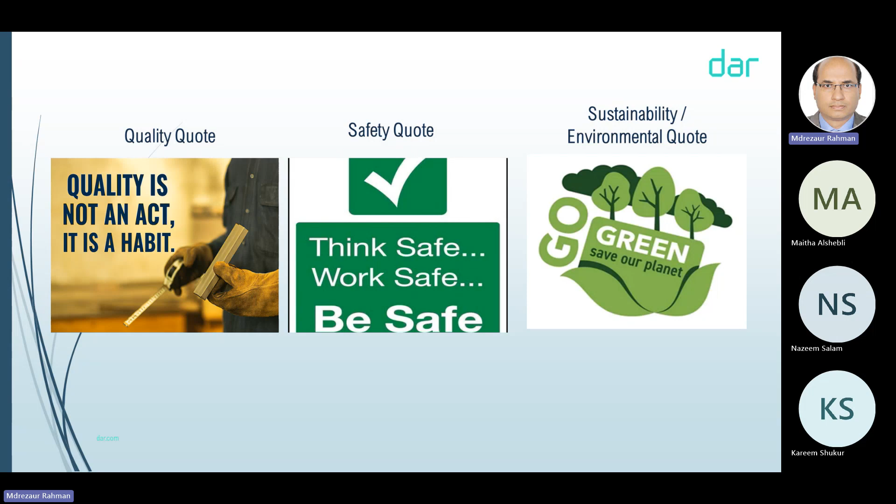So greenhouse, can anybody tell what is greenhouse? Greenhouse is, actually, normally we are using here SRC cement, sulfate resistant cement, which is making issues in the climate. Okay. Greenhouse gases. Okay, I will explain.

If you see, this is the sun; from the sun, sunlight is coming to the ground. The ground is absorbing the heat, right? And then it is emitting the heat again to the environment. But there are greenhouse gases: carbon dioxide, nitrogen dioxide, and a lot of chemicals emitted to the environment. Even the water, the cloud, what comes up after evaporation, is also greenhouse. So what is greenhouse gas doing actually?

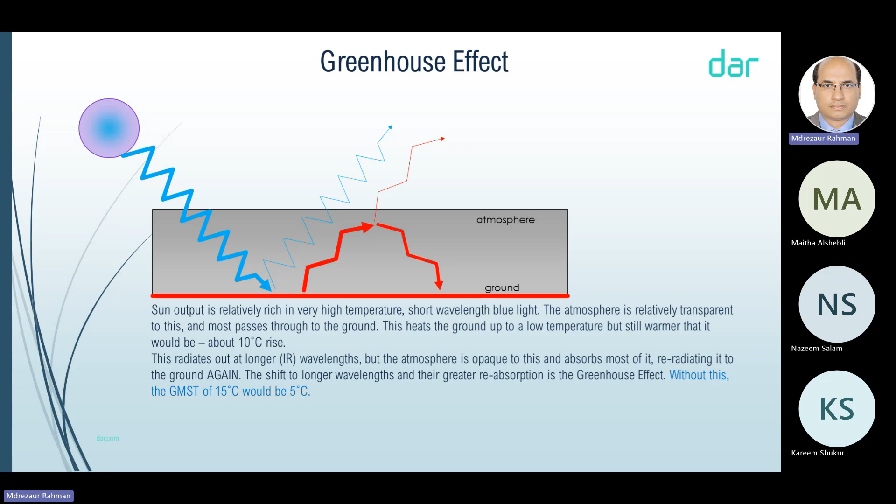So if temperature is high or if it goes down, this is also a problem. Right now it is a stable condition. That's why we are all afraid that if carbon dioxide emission is more, it will absorb more heat, and the temperature will be higher and we cannot live. Many plants will die. So this is the main greenhouse effect, shown by sketch.

Now I'm coming to carbon dioxide. What carbon dioxide is emitting is 76% of the total greenhouse effect. The remaining 24% is other gases. Got it? If anything needs clarification, you can ask.

So what is the source of carbon dioxide? For example, everybody has a vehicle, right? This petrol is basically producing carbon dioxide. Power generation, electricity - we need energy, fuel, coal. So all of these are basically emitting carbon dioxide.

That's why electric cars are encouraged. Elon Musk started another electric car company. Electric cars are environmentally friendly. So 76% is carbon dioxide - that's why the whole world is very concerned about reducing carbon dioxide.

In the EU, by 2050, net zero means carbon dioxide emission should be zero. That's why we're encouraging electric cars, although the target was 2030, it is impossible to reach by that year. So 76% of the total greenhouse gas is carbon dioxide - that's the main one.

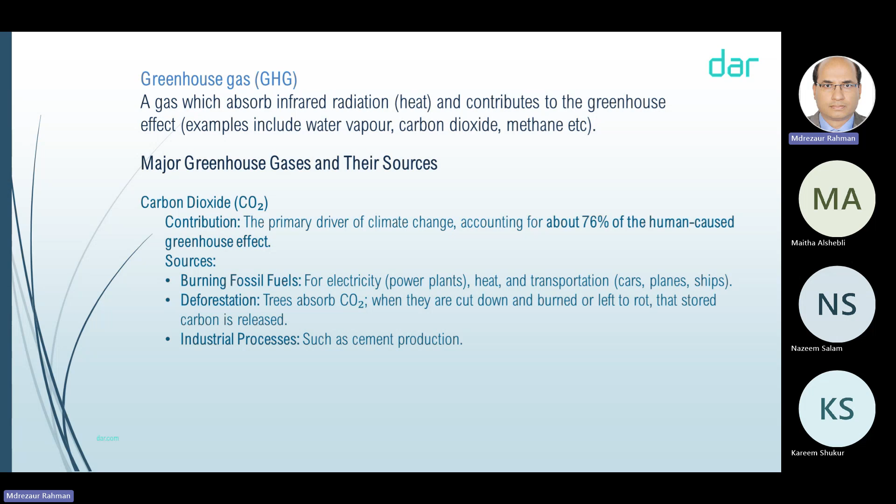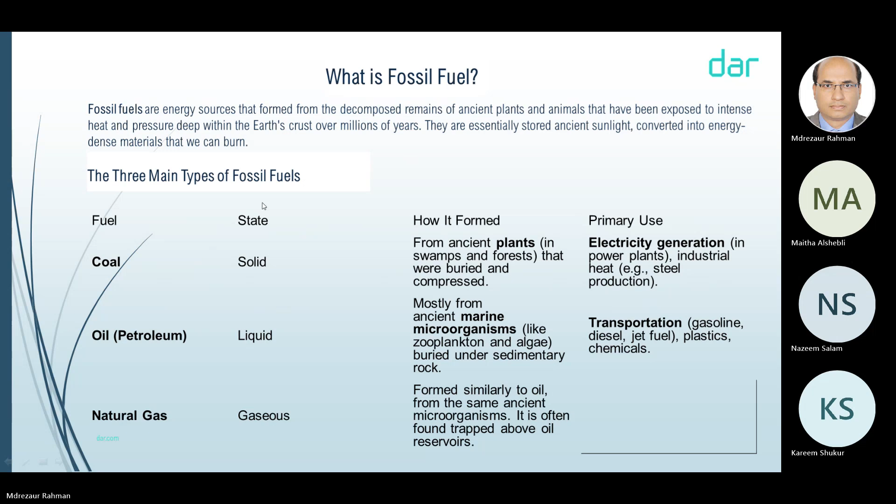Okay, Engineer Moore? Yeah, okay, so this is mentioned - where it is coming from. I'm going very fast. Now, which countries are most emitting carbon dioxide?

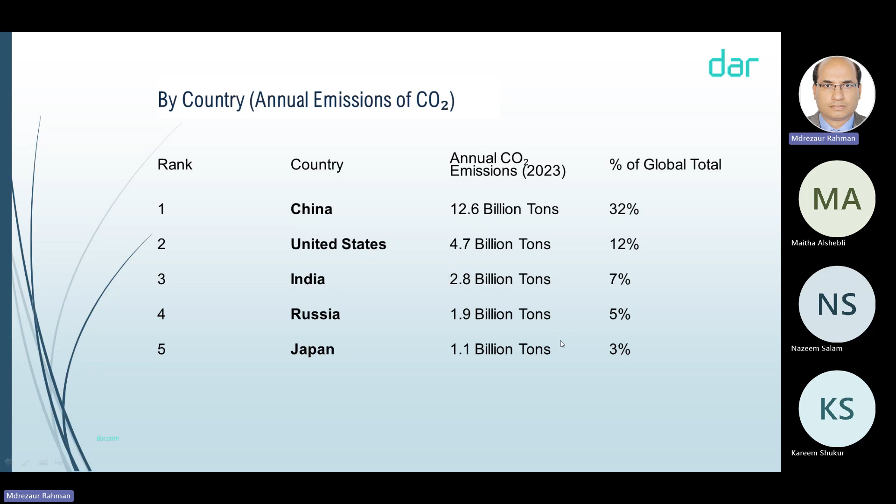China - China 32%, most of the people, most dense population. Then United States 12%, India 7%, Russia 5%, Japan 3%. They're emitting carbon dioxide.

Now this is the carbon dioxide - EU is a very small region, right? China is a big country, so China's emission is big. Now this is per capita, per person - the global average is 4.8.

Qatar is the highest. Qatar is a very small country, but they are using maybe 3-4 cars per family. Power generation is high and population is very less. So Qatar has 35.6. Bahrain has 26 point something. Most Middle East countries are very high because every family has a car. In China or India, most families have no car.

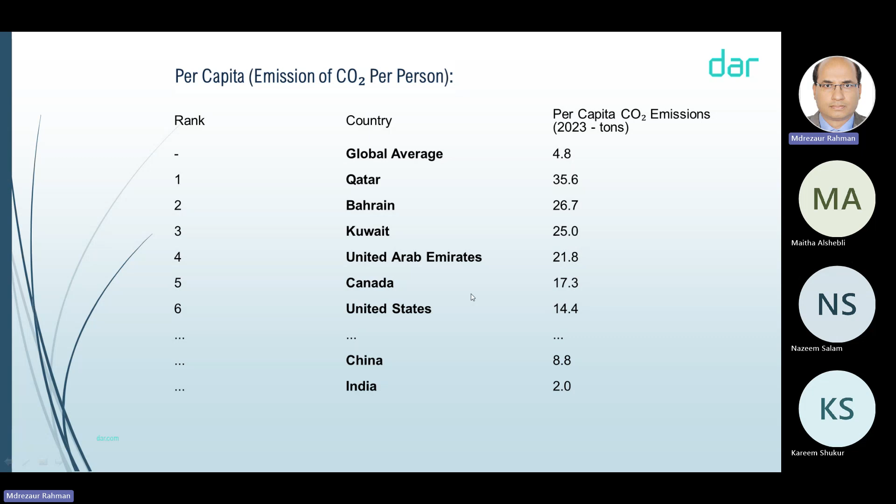This is sector-wise carbon dioxide emission - energy and electricity we're using is 40% of carbon dioxide emission. Transport - everybody is using it, you're using transport, right? So everybody is part of damaging the environment, everybody.

That's why we should reduce electricity use. I prefer that if I go out, it should be switched off. Use fewer cars, and water usage should be slow. Water generation also needs energy. So our every activity is damaging the environment.

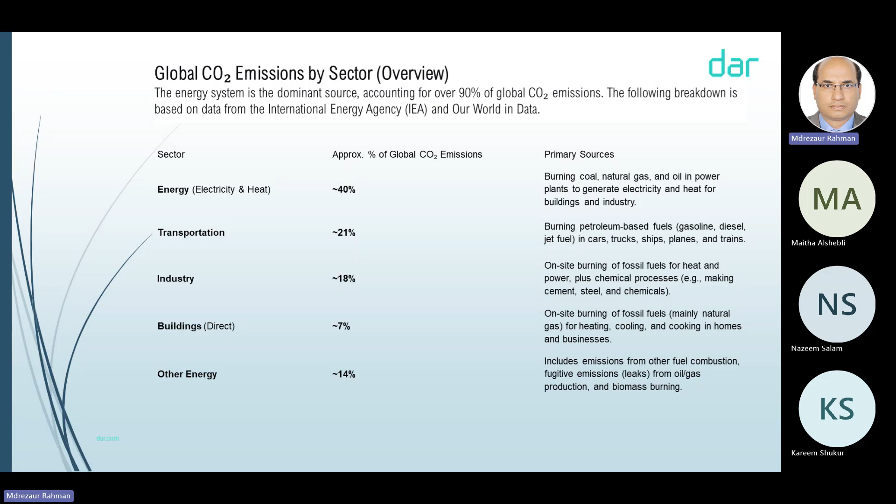Okay, now I'm coming to concrete. What is the relation between this previous subject and concrete? What is the durability? I'm coming to that - now I'm going to the concrete.

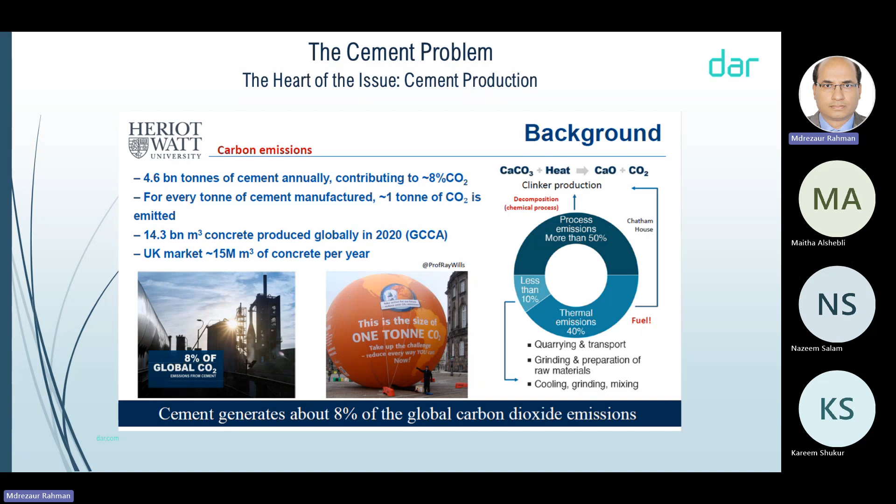Concrete - if you see below, 8% out of 100% carbon dioxide is from cement. That's why we are concerned, and we are replacing cement with other materials.

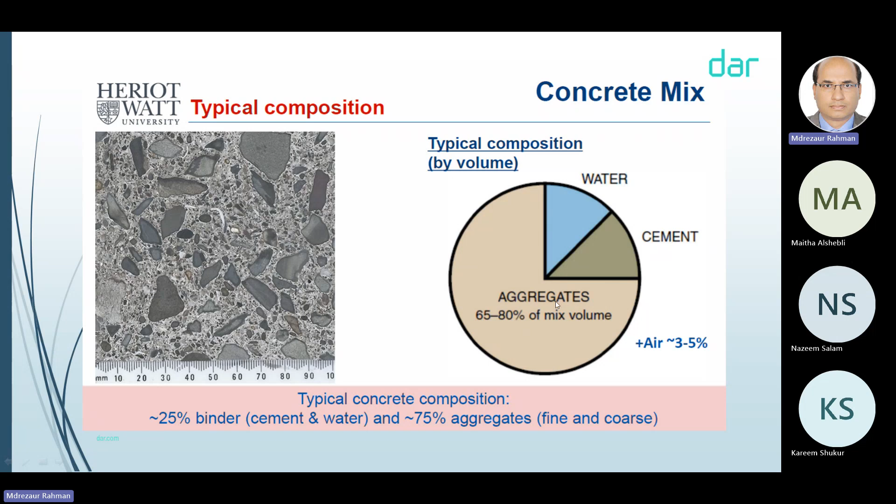If you see the general configuration of concrete, the aggregate we're using is almost 75%, while cement and water together are 25%. Now, cement production - I'll go to the next phase.

Cement production - do you know what temperature is used during cement production? 1450 degrees centigrade when cement is produced. This total heat used means a lot of coal requirement, a lot of energy required - 1450 centigrade during production. That's a huge amount, and it is damaging to the environment.

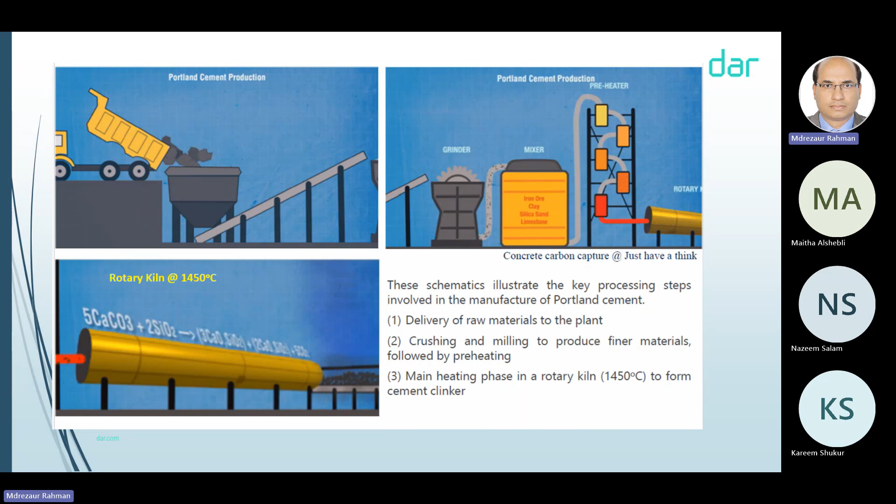That's why it is recommended to replace cement with GGBS and others. This is also only SRC - they are going through the same actual production. OPC and SRC have the same production process.

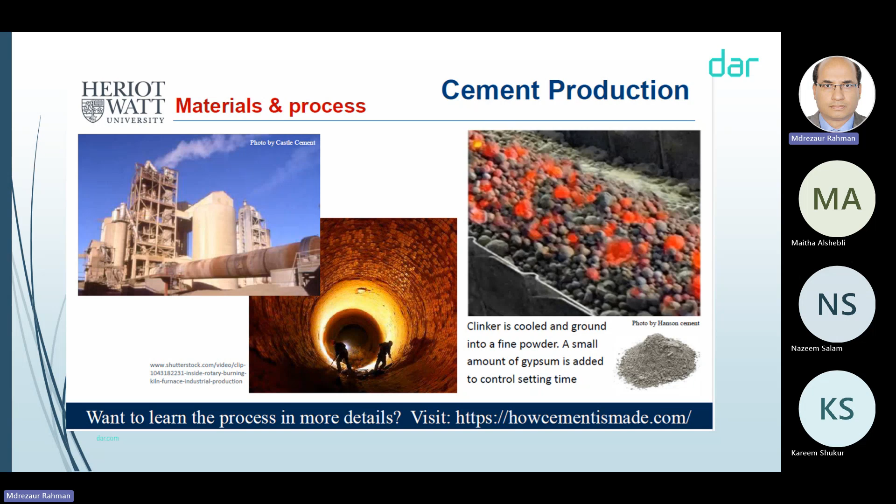Now what is the replacement? So you know, how many percent of GGBS are we normally using?

So why are you using GGBS? For green concrete, right? Because OPC is damaging the environment. If you reduce OPC, you protect the environment. GGBS is not damaging the environment.

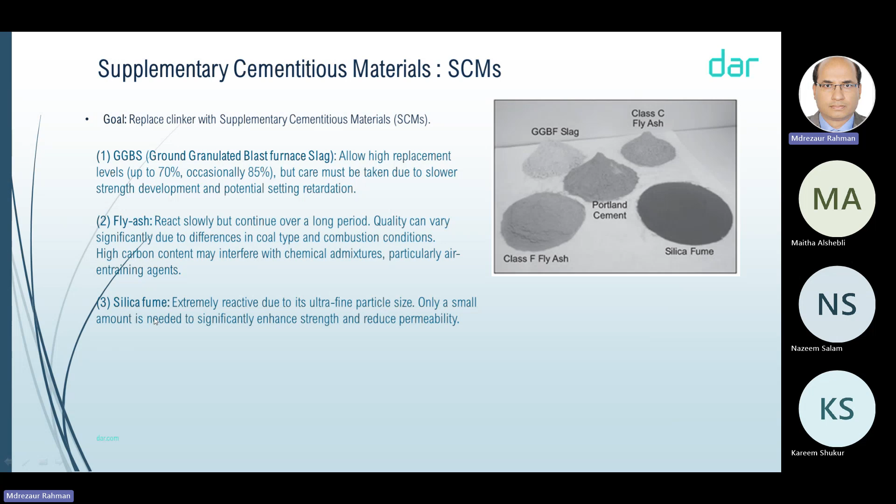20, 40 sir? No, no, no. I think it is used with GGBS. It's only used here with GGBS because it's very fine, it makes paste.

And it is filling the small points, that's why concrete is better. Normally if you use only cement, there is a lot of voids. Microsilica is only to fill the voids.

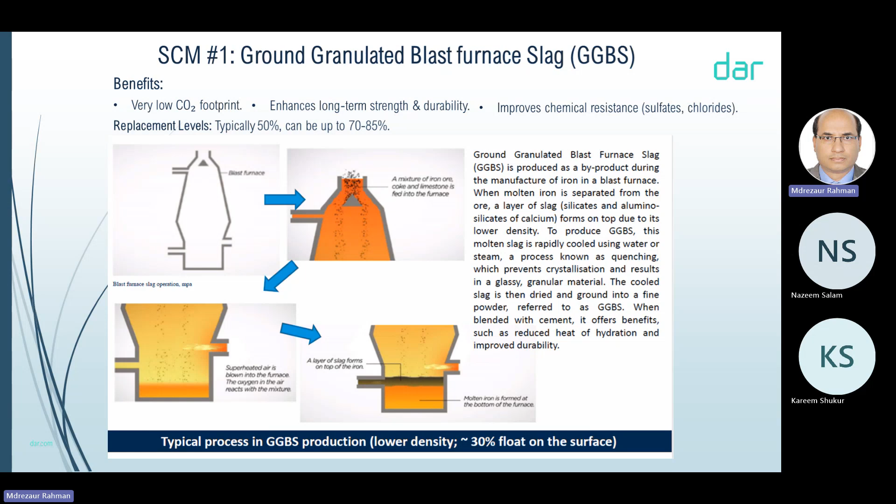Okay, so now fly ash. Fly ash also same like GGBS. Fly ash is producing when power plant, when electricity generation, if you see. Ritesh, hopefully you will take the next session.

When power plant, it is like a power plant. Fly ash use is coming from the power plant. When you use coal, it's the byproduct. Coal, fly ash is the byproduct of coal. Wherever you use coal, byproducts. So that means no need to produce it separately.

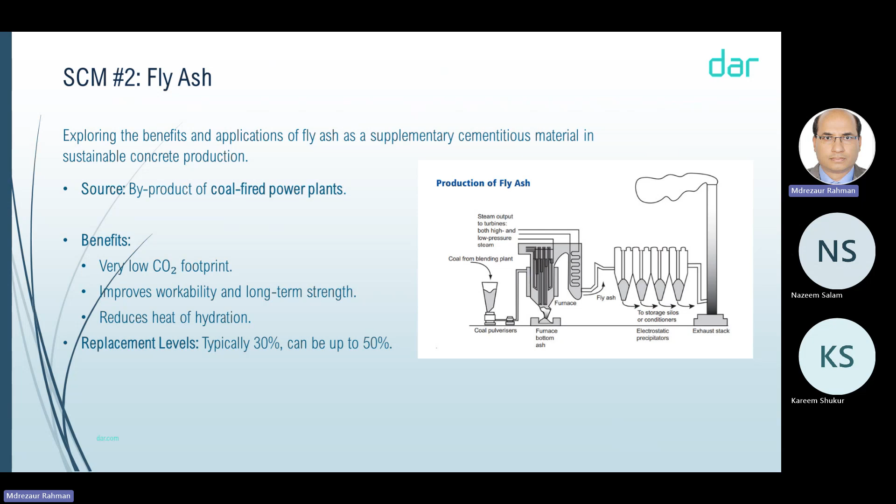Same like microsilica, microsilica is a byproduct. Any industrial, so your microsilica, from where is this production? I forget, it's not mentioned. GGBS is from steel, so microsilica from where? Oh silica, I believe it's metal. This is also metal. For the metal, it is a byproduct here, it is used. So it is not separately produced.

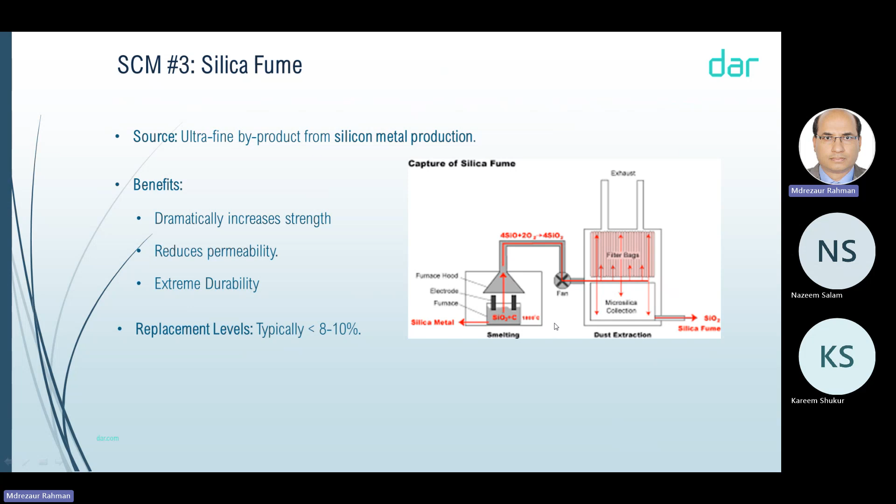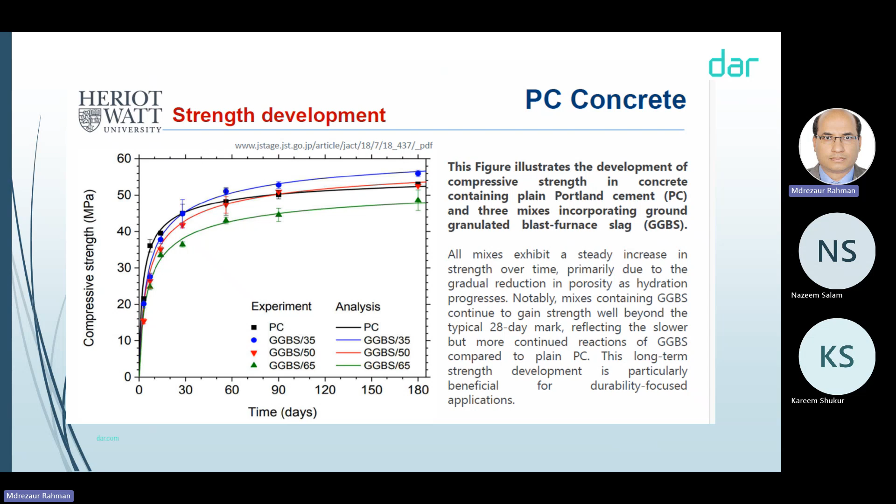Okay, that's why you are selecting it. Initially it can delay, okay. Now this is the heat of hydration. Concrete, when you mix the concrete, there's heat production, right? Do you have an idea about the reaction?

How heat is released or produced? When cement mixed with the water, the chemical reaction will result in heat. The heat will occur at the same duration as mixing. Exactly. So here, if you see that when you cast any foundation, for example encasement or whatever, so the center area.

Red area is high temperature. It will be high temperature because it cannot release heat. But in the perimeter it is releasing to the air, right?

Yeah, that's why perimeter area temperature is low and center area temperature is very high. So this area, it will expand, right? Heat is more means it will expand, and heat is less means contract. That's why this crack is happening. This is the reason.

Okay, so same it is mentioned here. And here, if you see the graph, initially quickly the heat is very high. Then next 2 to 4 hours, it is like that. Then again, initial set. Anybody has idea about the initial setting time?

Initial setting, when water... No, when this cement makes the chemical reaction with the water, starting from that chemical reaction, at that time is the initial setting time.

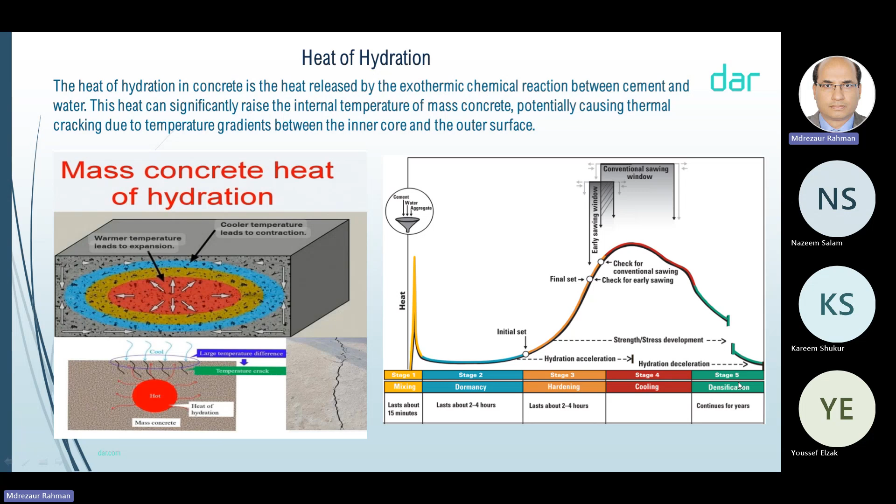Okay, so these are the basic reactions. You know what is a component of cement? Anybody has idea, component of cement? Okay, when cement and water you are mixing, it is showing cement water mixing.

It is creating gel. This is actually calcium silicate hydrate - you are creating gel. This gel is responsible for strength. Why is concrete getting strength? Because of cement. And why is cement getting strength? Because of this gel, as mentioned. This gel is creating strength and producing heat.

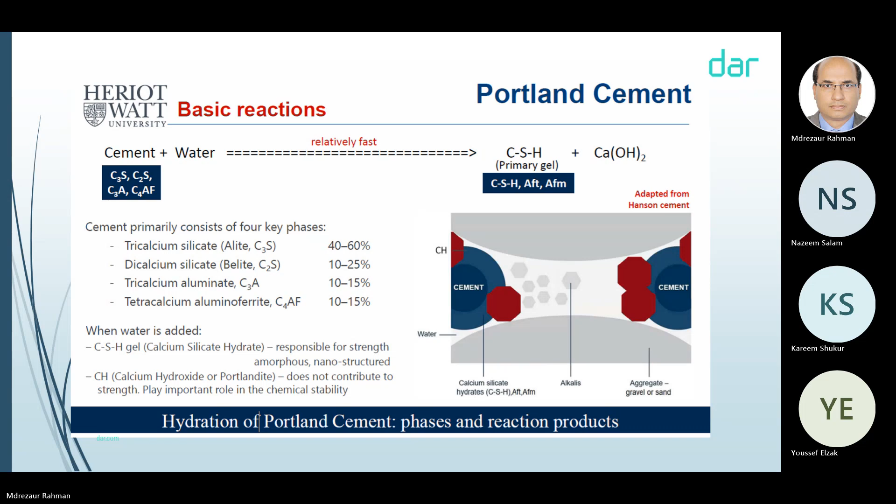When you use GGBS, what is the difference between GGBS and here? When you use GGBS, it is slowing down. OPC is very fast.

The chemical reaction will be slow when we use GGBS, it reduces it. Exactly. So if you use OPC, it is very quick - initial setting time is fast, final setting is also fast. If you use GGBS, initial setting time will be delayed. That's why if you use GGBS, the contractor cannot remove the shutter because it is taking getting time.

This is the basic reason. Today's session is for awareness of the basic things to understand when you go to site, why you will get more strength and more resistance. Exactly. So GGBS slows down the reaction, and that's why the initial setting time and final setting time will be delayed. Okay.

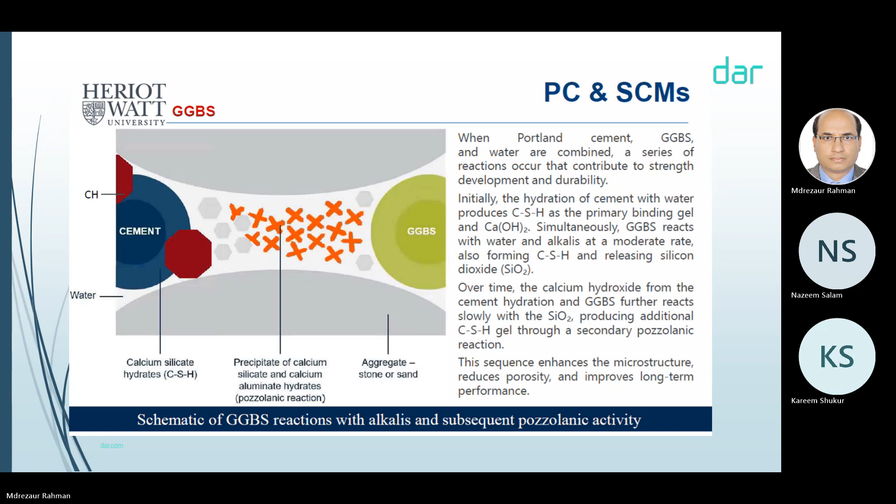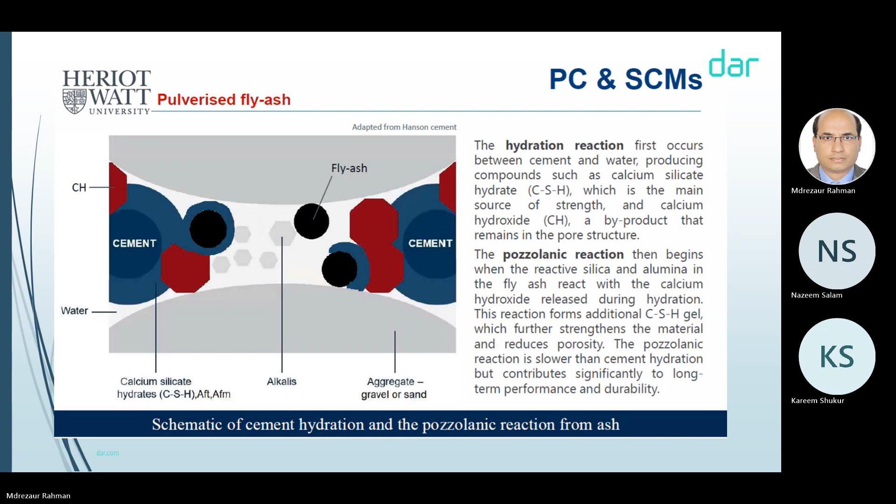Fly ash and durability are also affected with GGBS. Yes, exactly. So what I told you before, GGBS and fly ash produce a soft gel. This gel is filling the voids between the aggregate. This is the main reason for the durability. If you fill the voids, then salt... why are you using GGBS? Because then a lot of chemicals cannot attack. If there is a gap, chemicals can very fast reach and make rust. Okay, this we already discussed.

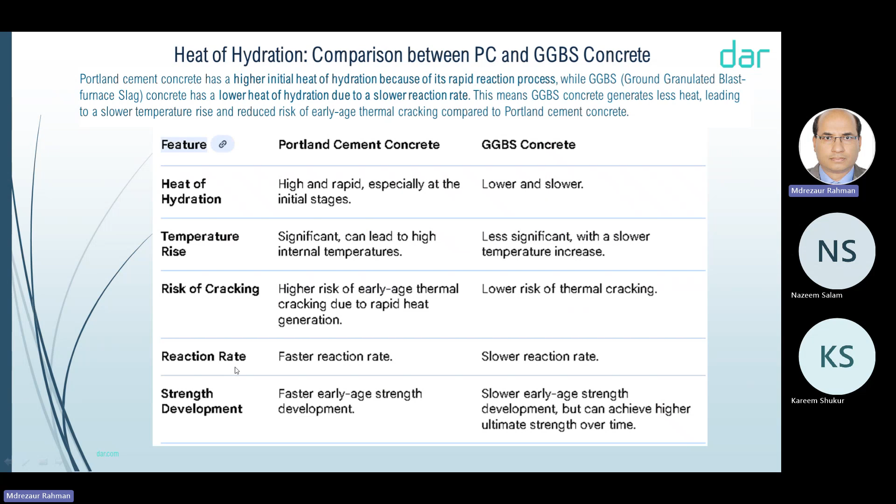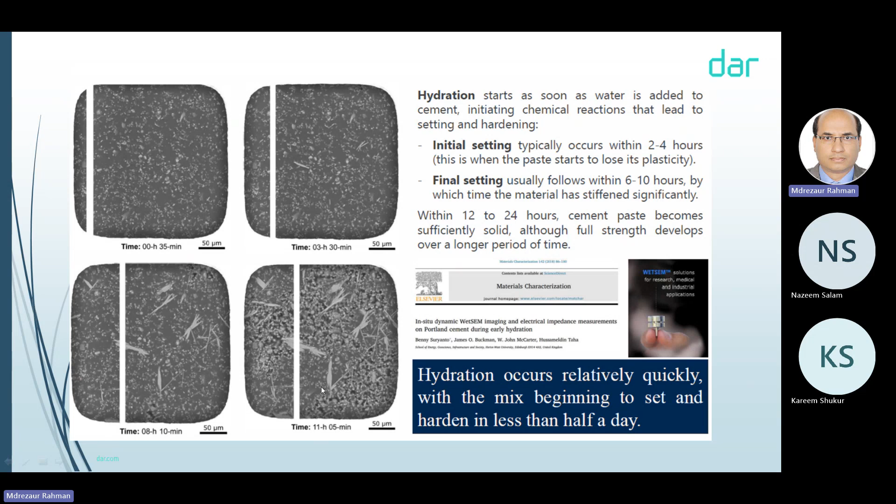This is a microscopic photo showing that after 35 minutes concrete is like that. After 3.5 hours it is like that. After 8 hours 10 minutes it is like that, and after 11 hours 5 minutes it is like that. This is another area. This is showing that after 7 days, concrete is getting 70% strength. So that's why we are taking 7 days cubes, 70%. So always check. Nasir already knows, right? Yeah. Always go for crushing. You will see, but 7 days is indicative. The final test result will be based on the 28 days result.

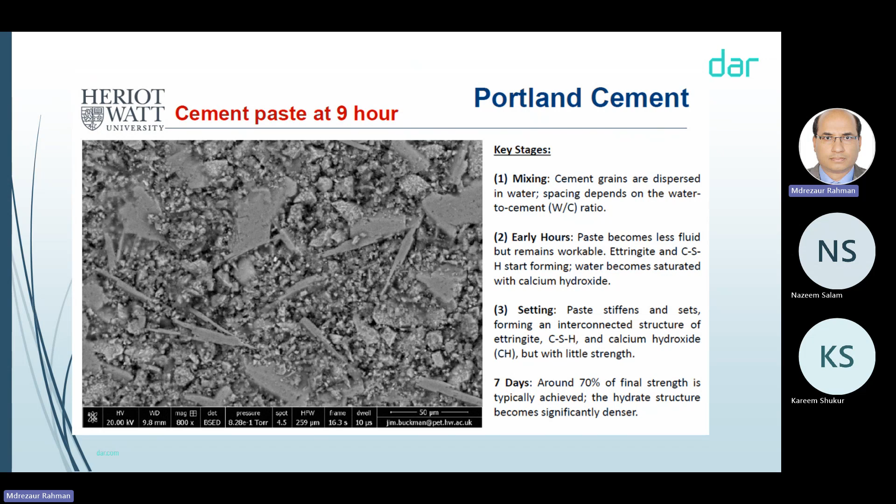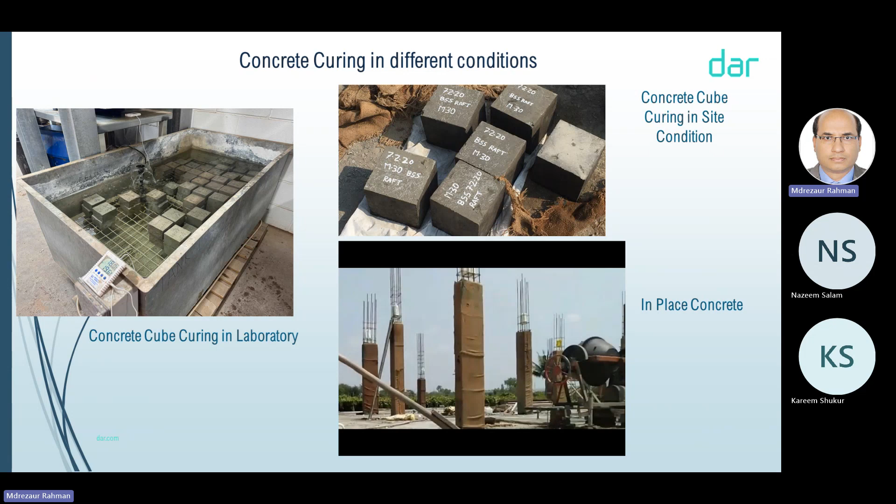because of the temperature. Temperature maximum 30. No, this is the environmental temperature. Because a site cube is very small and it is releasing the heat, the concrete temperature is very low. When you cook, you need to increase the temperature, right? When it reaches a certain temperature, then you can cook. Concrete is like that. More concrete temperature means more strength, because there is more reaction. More reaction means more heat generated and more strength. Every particle reacts with high temperature. Exactly.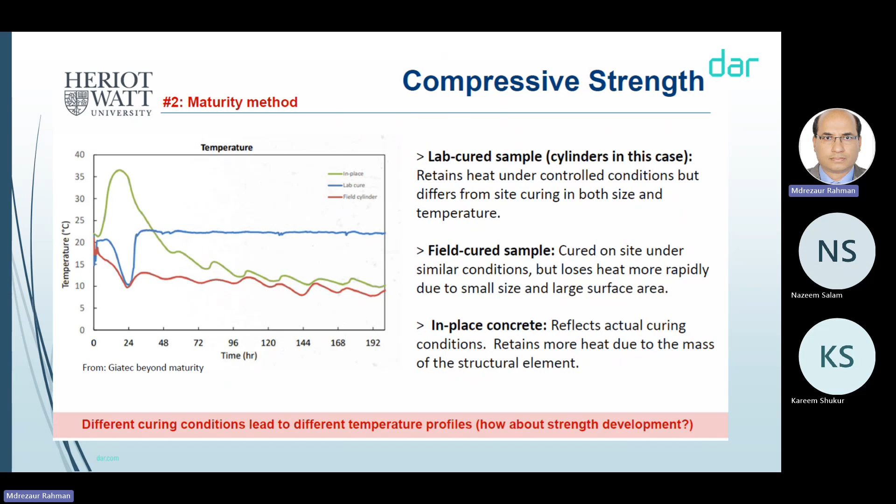And the laboratory is always 20 degrees, right? Always 20 degrees centigrade because it's temperature controlled. Curing 20 plus or minus 2, and the room temperature 25 plus or minus 1. Minus 1 or minus 2? Minus 2. But the ambient temperature is maximum 40. This table is also showing the same. Why are we doing this curing? What is the purpose?

What is the purpose of curing? Curing is done for the durability of concrete, for the strength of concrete. If you do not cure the concrete, the strength will be affected. It will not get the permanent strength, because the cement cannot do the chemical reaction without water. So if we do curing, the cement will do the chemical reaction to reach maximum strength. When we do concreting, there is moisture inside the concrete. If we keep it without curing, it will be absorbed, then the concrete will not get the required strength. Yeah, that's true. When we are curing, we are not giving strength from outside.

We are just protecting the inside moisture. Same. But sites also need the same procedure? Yeah. But who is pouring it? No, only 2 days curing. After that, finishing. Now we have to control. Outside, no curing.

Outside there is a curing compound, right? They are doing very well. Quality is better. They are doing proper curing, right? Yeah. So curing is very important. This is more effective, because they make it protected, so the inside moisture is not going out.

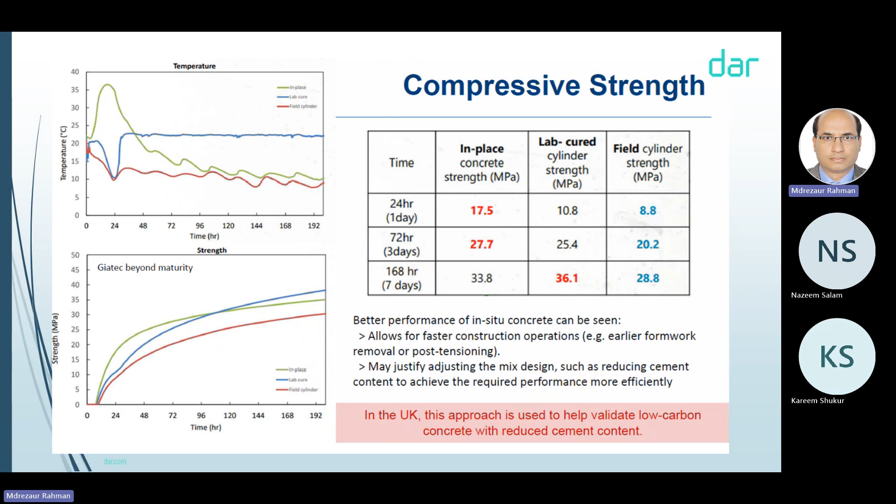Okay, so this table is also showing the same: this is in-place concrete, this is lab concrete, and this is field. So initially, in-place concrete is high, but after 7 days, the cube in the laboratory is getting higher. Can I proceed? Okay, I'll share with you.

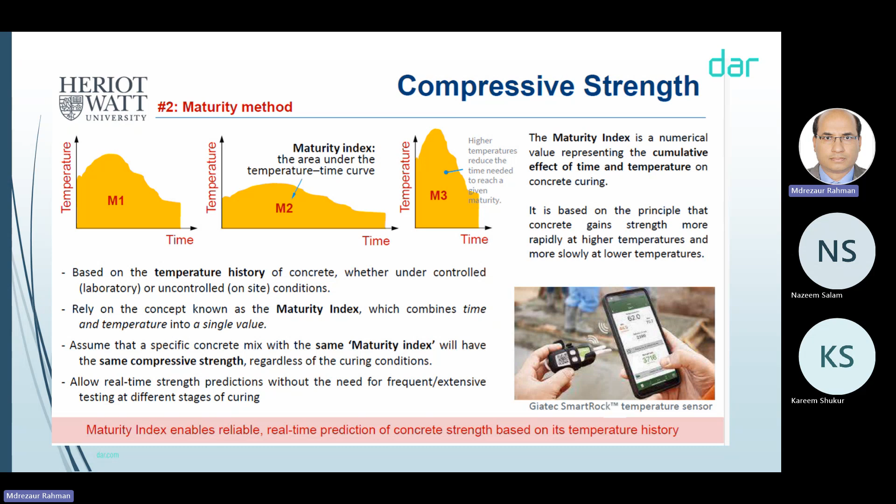What I told you before: more temperature means more strength. This is showing the same, maturity. This is called maturity. Concrete maturity will go up if its temperature is high. Temperature is high, and as time passes, more strength. So if you see, it is showing 7 days.

So if you plot strength and time, initially it is going up, and after 7 days it is almost horizontal. That's why we are taking 7 days curing. 7 days curing and 7 days result. Because after 7 days, normally 28 is better. Exactly. Because after 28 days, the concrete will be 90%.

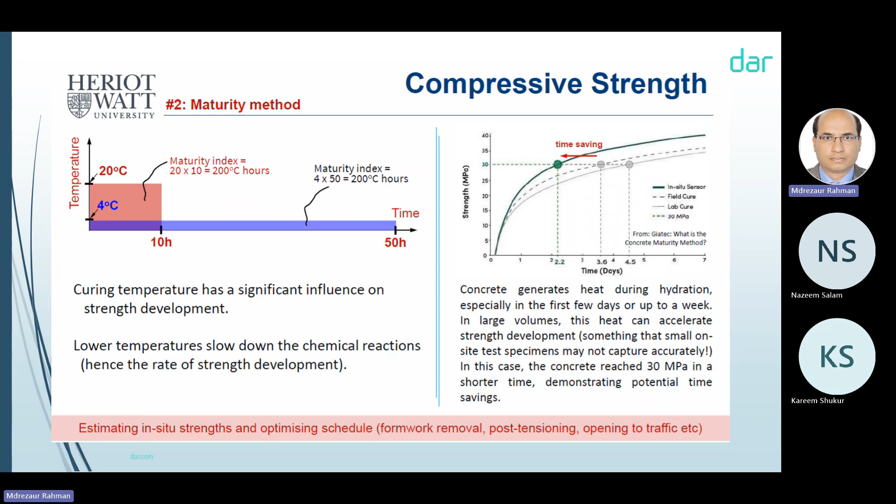Yeah, but 7 days is only indicative. If we are achieving 75% of the 28-day strength in 7 days, then we can say that it's okay. Exactly. But the 7 days is only indicative. Full, actual strength you will get after 28 days.

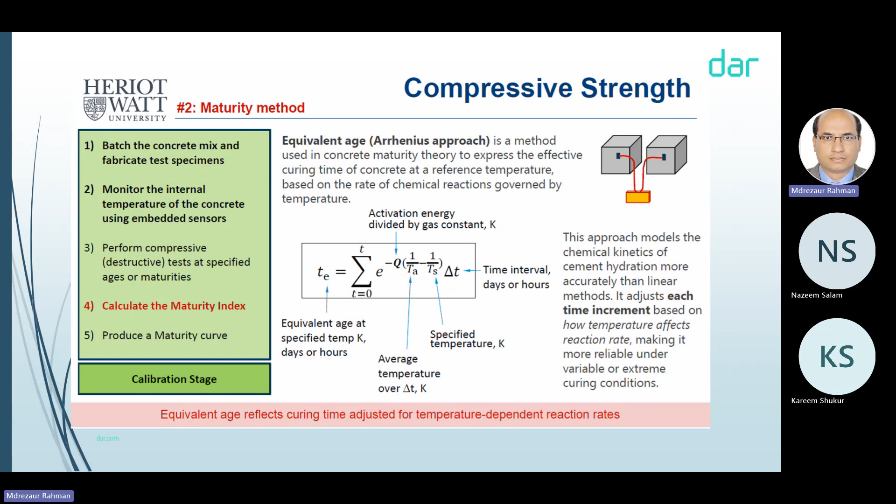Concrete is named 40-20. 40 means minimum compressive strength at 28 days. And 20 means size of aggregate. Because it's internally wet up to 8 days.

Okay, now durability, for the rust. In concrete there is reinforcement, and reinforcement is getting rust, right? What is the reason for getting rust inside the concrete? What is it? Absorption?

First of all, everyone knows what is concrete durability and what is concrete strength. It's different. Durability is the age, the life of concrete, and strength is the power of concrete. If a concrete structure requires one strength, it will bear that. If the load increases, it will fail, but up to this strength, it will be safe.

This is concrete strength. And concrete durability: for example, one structure is designed for 50 years, and if it withstands 50 years, it means it's durable. Long-lasting concrete. Long lasting means more economic. Durability is affected from outside, like weather. So if you see the photo, there is a lot of rust.

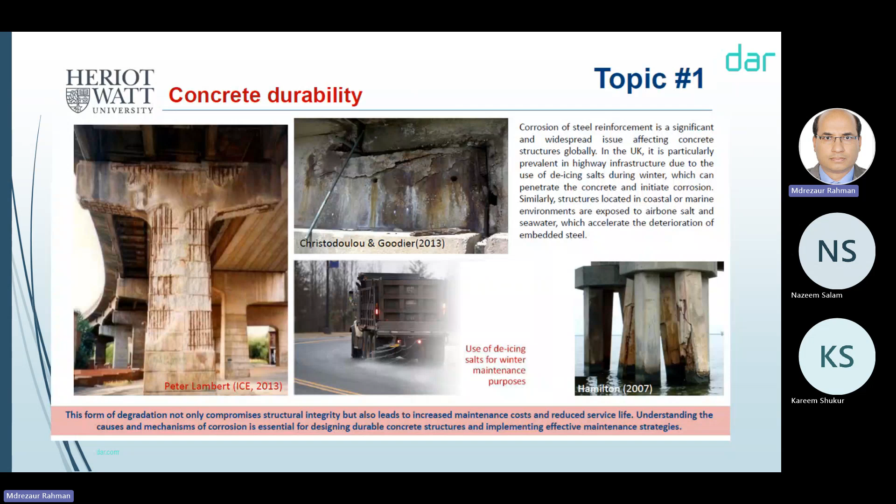So do you know what is the salt we are taking? Cooking salt. What is the chemical? Sodium chloride. Yes. The same sodium chloride is available in the sea water, and the same sodium chloride is available in the soil.

That's why ground foundation is always with GGBS, right? SRC or GGBS. Actually, we are using it under the ground. This is the reason, because there is a lot of chloride and sulfate, and especially sea water has carbon dioxide also.

That's why, to protect against chloride and sulfate, to resist against this salt, they mentioned SRC, sulfate resistant. Durability factors. That's the reason for the steel rust.

So it is shown what the percentage is: chloride is 55% in the seawater and sulfate is 7.7%. That's why chloride and sulfate are the main reason. These are like villains in a movie; this is the villain of concrete and steel.

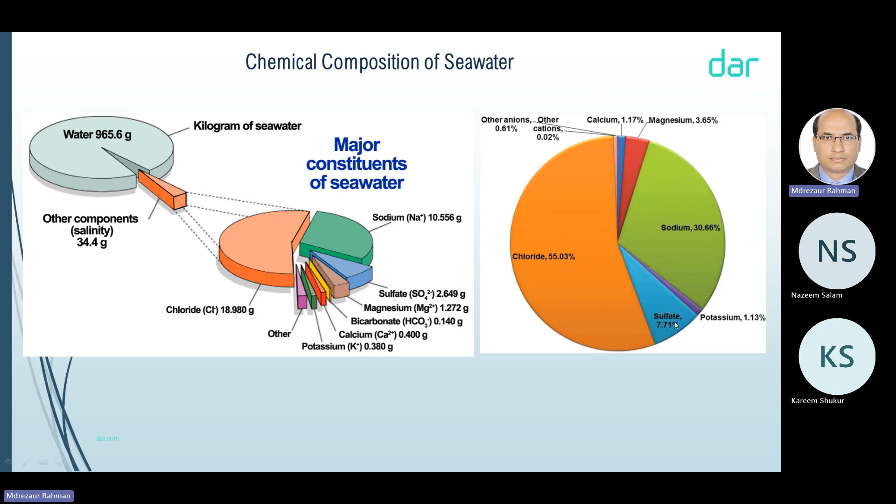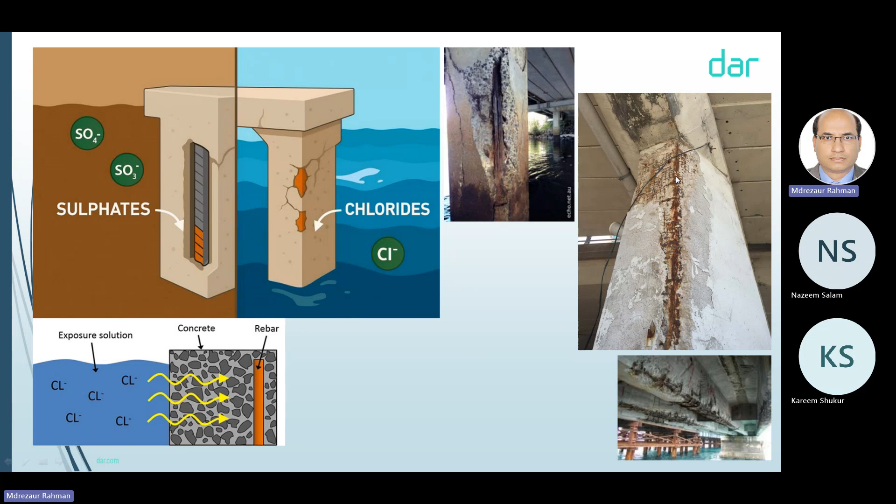Okay, this is also showing the same: it is reinforcement steel and how it is affected by rainwater. It's rain, it's cloud. This is coming in and it's getting rust.

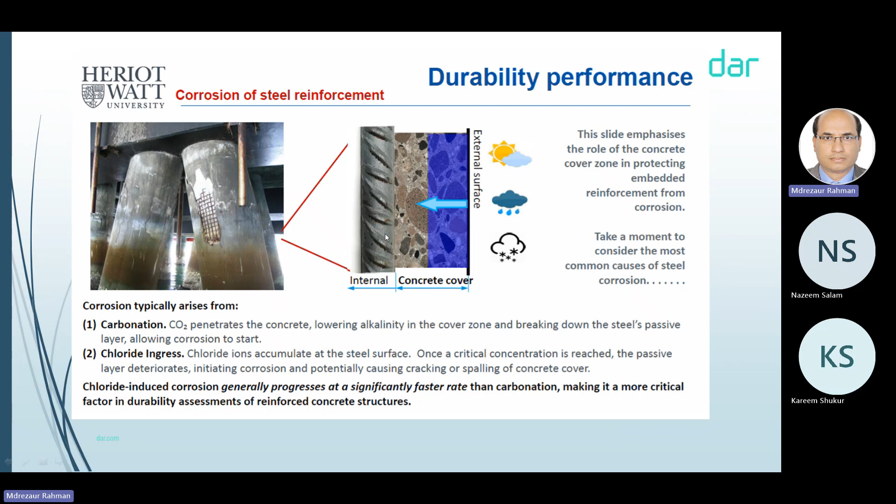So rainwater also has chloride. If you see rainwater percentage chloride, what is chloride? Chloride is 7%. Rainwater also. Is chloride bad for steel or for concrete? Both. Chloride and sulfate are the enemy of concrete and steel both. So always we have to hate chloride and sulfate, but we are taking them in food. We cannot avoid. Only for concrete you can hate.

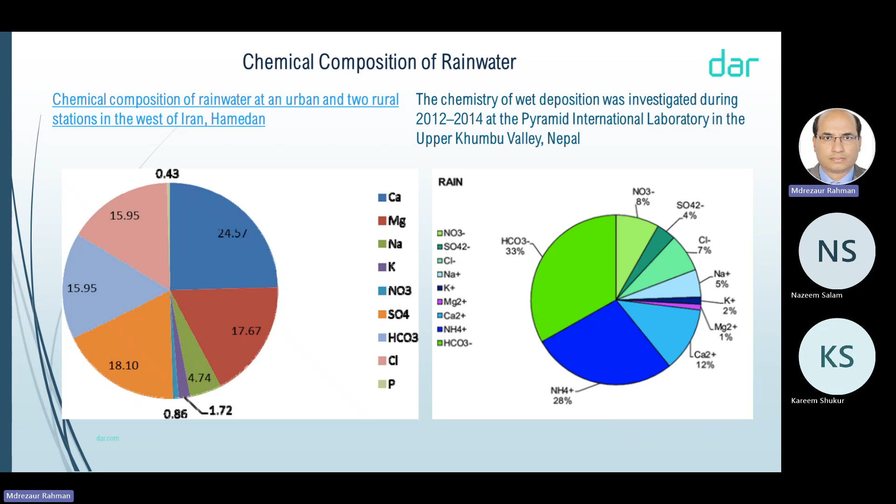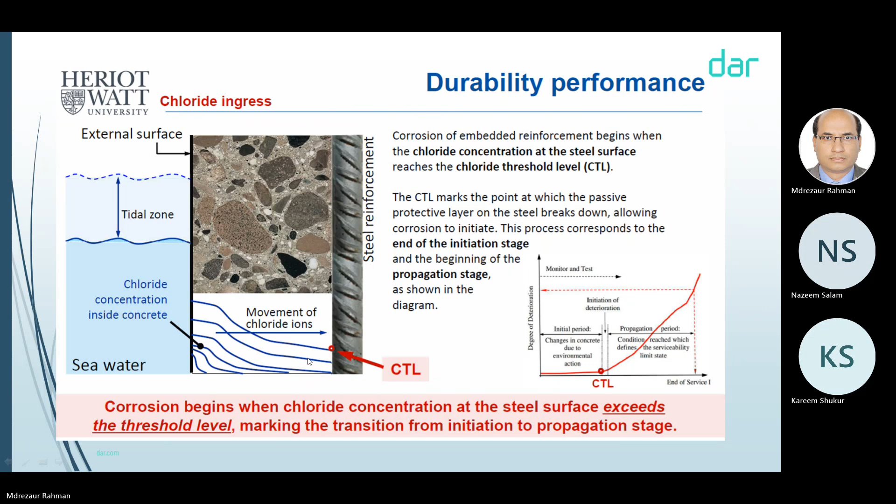Okay, this is our discussion of the source of chloride. We will go first. And this also, it is going. This also if you see, it's going like that. That means it is showing that more voids pass the chloride very fast. It is showing chloride very fast if there are more voids. That's why fly ash based is more durable.

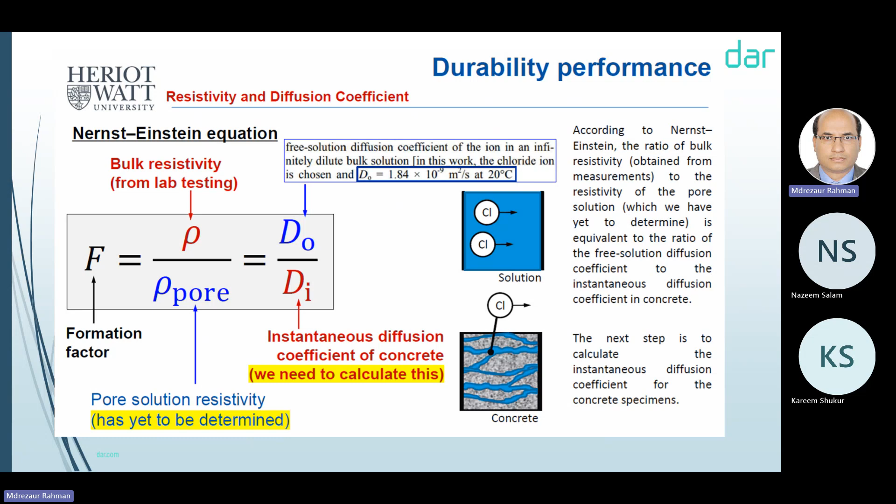This is actually coming from this. There is some calculation and chart. This one is structural, another is environmental. For the sea, for example, if your next project is in the Dubai port and there is a big foundation, the clear cover maybe 15 centimeters. Why 15? Because the chloride content is more, and they are checking how many years it takes to reach the steel. More depth means it will reach maybe in 100 years, less means maybe 10 years. This is the concept.

And concrete also, not the same mix design. We have to select the mix design; in some concrete chloride is going very fast, some concrete is very slow. That's why microsilica is used to fill the voids. If you fill the voids, they cannot go. Voids means passes actually. If the passes are open, everybody can run and go to the steel. That's why microsilica is used to stop the way. Microsilica is the enemy of salt.

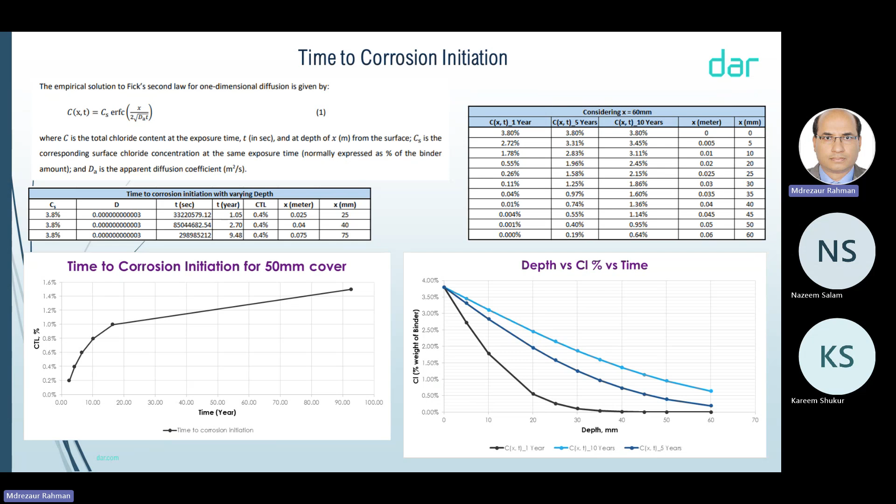So this is very short because this is a wide thing. The purpose is to get the basic concept of concrete: what is its strength, what chemical is responsible for strength, what chemical is responsible for durability. It is a huge thing. I'll share the presentation. If you have any doubt, come to me. The durability tests, six or eight tests, I did not include here. It is just the concept.

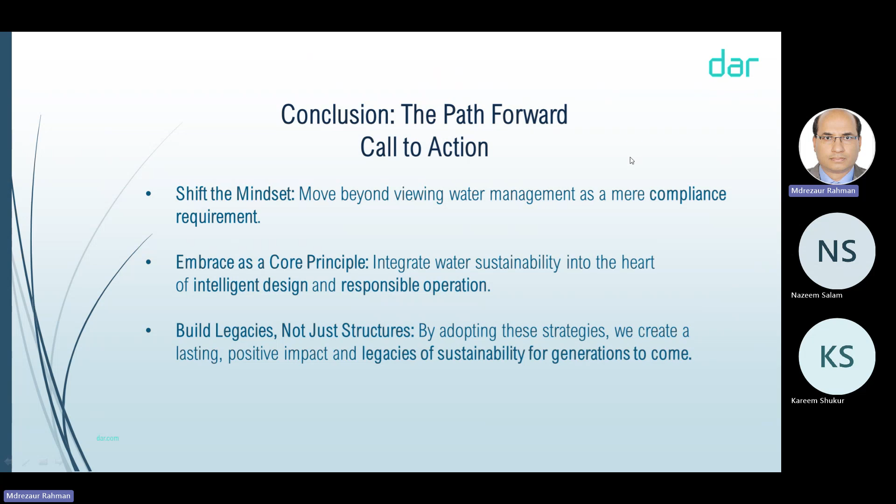What is the solution now? The compression strength failed in 7 days and in 28 days. What is the solution? Then we should go for two options. If there is an additional cube sample, then we can test it. If it failed, then we can go for non-destructive and destructive tests. Then you will check the cube size which was prepared, maybe it is wrong.

You didn't face any failed cubes? I faced, but the mold size was wrong. If this failed, then you have to go for non-destructive or destructive test. You have to take the sample. But you didn't face it before, huh?